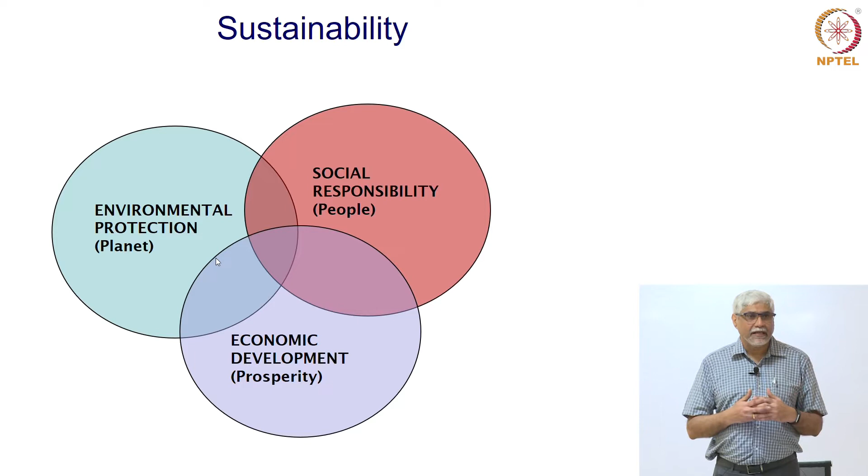We can go into more detail on the part of sustainability which influences people, or the social responsibility. We could look at the different aspects that will benefit people or can affect people. What comes to mind right away is that people should have a place to live and work that is comfortable, should have water, food and so on, and comfort, hygiene. These are things that people would require to live in a proper way.

Further, we look at transportation, how people can move about without wasting a lot of time, without facing a lot of difficulties, how people can be transported. So these could be aspects of social responsibility that engineers, particularly civil engineers, could be concerned about.

About the environment, what is it that we want to protect? What should be protected in the natural environment, in the planet, so that, as I said before, future generations are not affected and other species that we share the planet with are not affected. So natural resources are of very grave concern. We cannot use up all that there is on earth for satisfying the needs of the present generation or just the next generation. So we are worried very much about conserving the natural resources.

Other than that, as I said before, we share this planet, we share the natural space with other species, fauna and flora, animals, plants and so on. Many have become extinct because of human intervention and we want to prevent this or at least slow this down as much as possible. So we are worried about the green cover, the vegetation, and what has been talked about a lot is climate change.

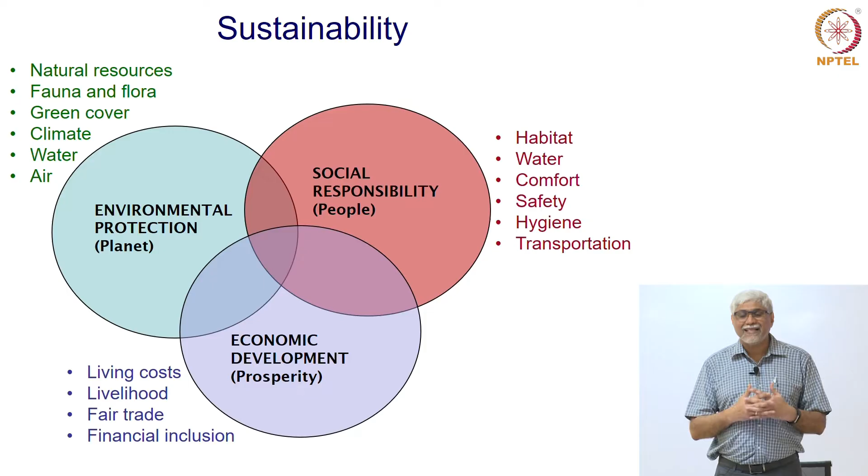So we will take some projects, some types of projects and see how we can go about in the future. Two questions are what we have to ponder about. One, is civil engineering doing enough? Can it do more to make sustainability better?

Secondly, as we go along, we are seeing so many new fields of engineering coming up, so many changes happening. Is civil engineering sustainable? Will we have civil engineers, say, after 2050? By the time this class retires, will civil engineering become obsolete, or will there still be jobs for civil engineering? So these are the questions I will try to answer during the course of this lecture by taking examples that are important, have made a big mark on the world today.

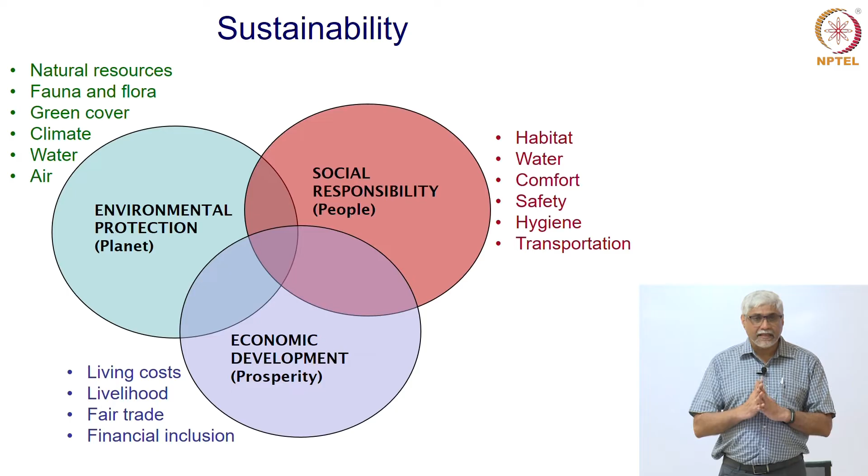So to summarize what I think civil engineering does for sustainability, for improving sustainability, civil engineers and civil engineering provide infrastructure which is very important for economic and social development, for commerce to happen, for industry to grow and for people to be happier and more comfortable. We need civil engineering infrastructure like bridges, transportation systems, water networks, sanitation and so on.

Civil engineering also provides or tends to provide housing, better workplaces, more comfort and safety. We also deal with infrastructure which is for public use, such as hospitals, water supply networks, sanitation systems and so on. So these obviously are beneficial to people, to commerce, to the industry.

Further, civil engineering in most large projects, and probably more and more in every project, plans or tends to protect the environment and the natural resources within the planning and execution. We don't want to have a project that will use up all the resources and create harm for the environment. Okay. So let us look at specific examples and see how different disciplines of civil engineering contribute to making something that is useful in these different contexts.

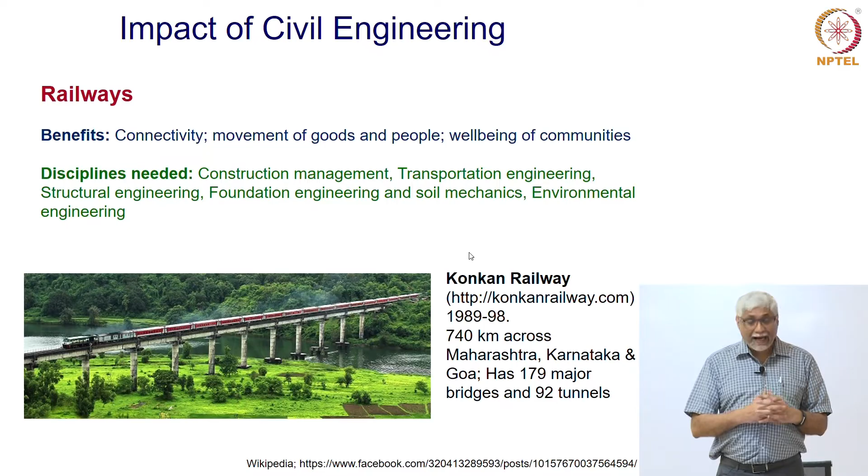Similar to railways, we have airports becoming very important. A community, a city or a town is said to have developed when it has an airport. So, it is always a landmark when a city claims that we have an airport. Some cities claim to have more than one airport. So, this means that these regions are very developed. It is a sign of development other than connectivity and goods.

Construction management. At this remote area, how can we make technologies available for fast construction? Okay? And transportation engineering obviously to plan the systems, how to control traffic, how to make sure that planes can land safely and take off safely. Okay? So, this is also an example where again connectivity has been brought in.

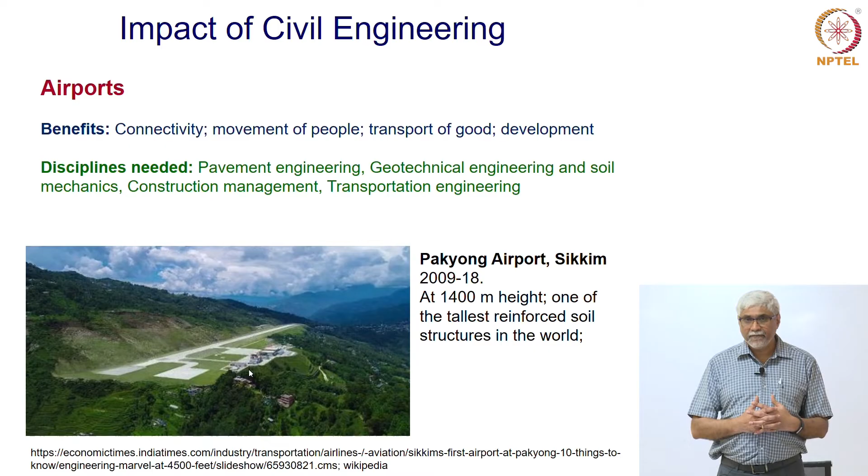Within cities also people have to be moved, and we find that in India almost all the major cities have a metro rail project, and it is also almost guaranteed that for the class of today, until you retire, there will be at least one if not more metro rail projects happening. Why are these so important?

Because we can decrease the traffic congestion, we can have people reach their office from home, go from one place of commerce or entertainment to another quickly without causing so much of a carbon footprint when they have to use their own vehicle. So, the welfare of people is very, very important. People, if they are able to move around efficiently and economically, will promote the society.

Pollution is better if you imagine everybody using public transport instead of their own transport, having a scooter or a car. There is a lot of pollution, and the whole carbon footprint decreases. What do we mean by carbon footprint? It is the carbon dioxide emissions coming from burning of fuel, from using machinery, from making machinery and so on. All this will decrease if we have better metro projects, more metro projects.

So, again a lot of these metros utilize tunnels. For example, the Delhi metro started construction in 1998 and is still going on, they are adding more and more. Right now, it spans about 400 kilometers, 285 stations and 2,700 trips daily, which can take about 5 million people every day through Delhi.

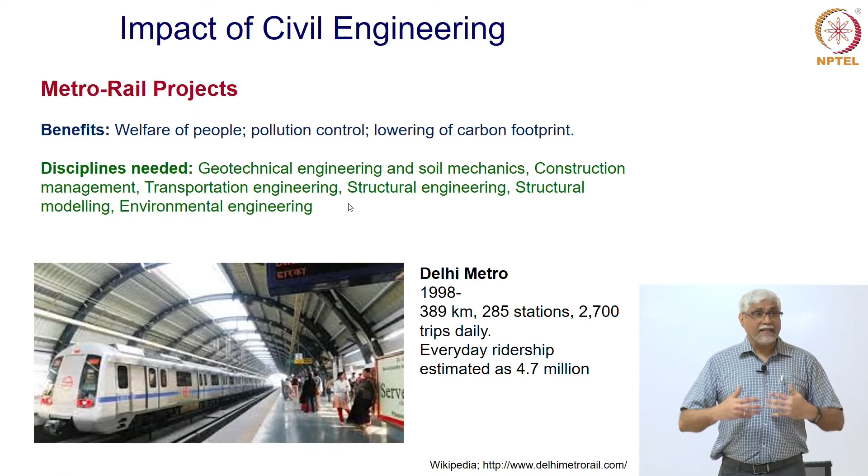We also contaminate, we have also messed up a lot. So, civil engineering also comes in remediation, not only to make things, new things, but also to correct mistakes of the past. So, contaminated water is available in many, many places. So, remediation or cleaning up is a very important thing.

So, major effort was taken to clean up this water, separate the more toxic from the cleaner water, take this toxic water, mix it with cement to solidify and put it in these containers of concrete so that this can never escape. Okay. So, this was a major project. In each of the slides, I give you some references that you can get more information on.

So, here environment protection was very, very important in health, because if you have this toxic water or waste lying around, eventually it reaches the groundwater, and groundwater is what we eventually will drink. Other things get affected, animals, plants, the environment itself changes and gets affected if we don't clean up.

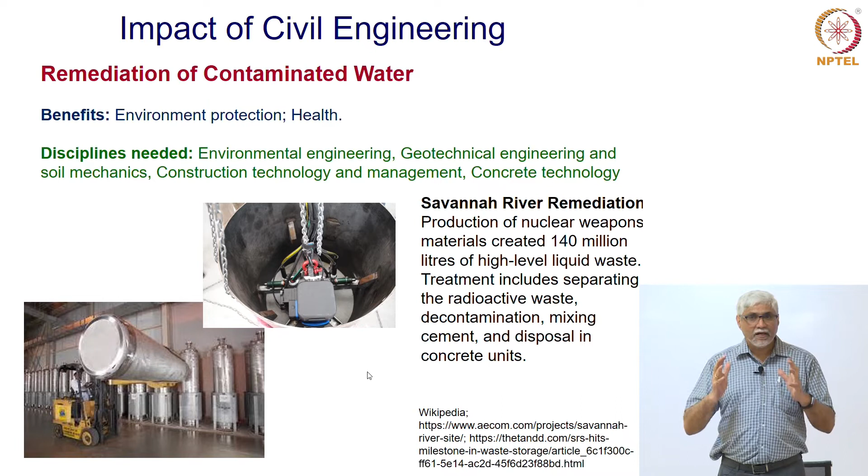We talked about projects, we can also talk about smaller projects, systems of civil engineering or even elements. Bridges, which form part of many of the projects that we've talked about, connect people. We have seen, you might have experienced by yourself, that when a bridge is built, new commerce comes up.

Small populations rise around a project at the beginning, at the end of the bridge, and shops show up and commerce increases, connectivity is better. Instead of going around a bay, they can cross the bay faster. Okay. So, carbon footprint decreases, pollution is less.

So, again structural engineering is important, modeling is important, because we want to know that the bridge will be stable for many, many years, that it will not settle down, it will not break, it will not crack. Geotechnical engineering for the foundations, construction management, transportation, environmental engineering and so on.

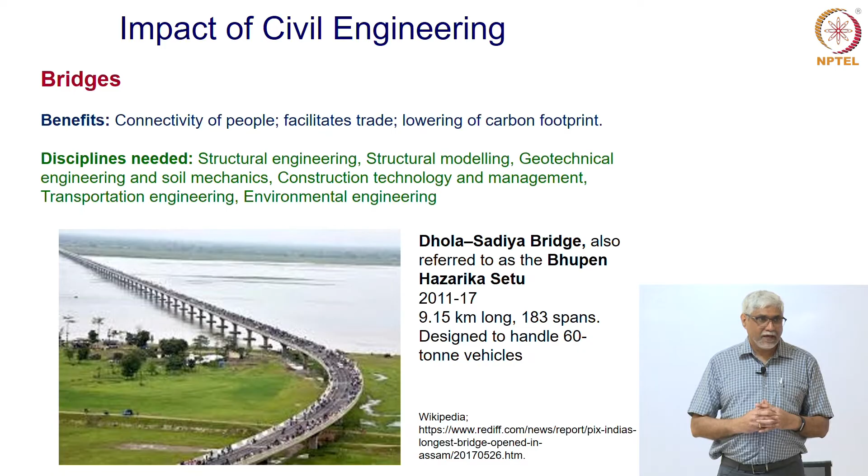Why do we need oil? We need energy. For progress, we need energy. For economic progress, it becomes very, very important to transport oil with the least carbon footprint, messing up the environment the least. Instead of having trucks and tankers, can we have a pipeline? But you can imagine a pipe running 1,300 kilometers. There has to be a lot of modeling done because the pressure should not drop, there should not be leakage. If there is a leakage, we should be able to detect it.

So, a lot of sophistication comes in to modeling it, constructing this, what are the type of structures that are required to keep this pipeline above ground, what sort of modeling is required, and the geotechnical engineering. What will happen when there is freezing and thawing of the ground? When there are colder temperatures, how will things change? So, these are major projects, very unique. This is not something that you hear of every day, but a project like this can last for a long time and will require major management to make it work.

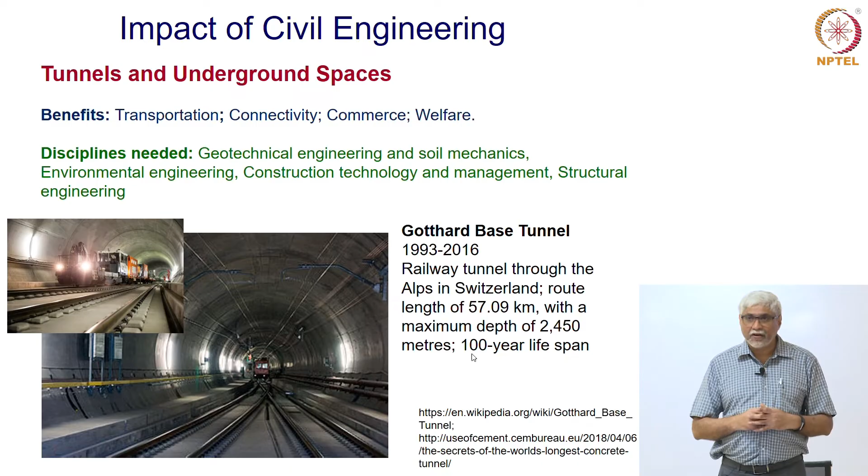Talking about modeling and engineering and planning of traffic. The modeling of traffic in cities, between cities is becoming more and more complicated. And in a country like India, you have all sorts of traffic, what they call multimodal traffic on the road. You have an auto rickshaw, you have a cycle, you have a bike, a big bus, a car and so on.

Further, what people are looking at is automated vehicle traffic. You must be hearing on the news that there are driverless cars, where instead of driving your own car, you are just enjoying the ride or being transported. So, there is a lot of traffic flow modeling which is happening in all these cases of possible traffic being only of automated vehicles and driverless vehicles. Groups of vehicles, how are they going to travel in the roads, through the roads and into the cities?

Why would we do it? We want to decrease time delays, we want to decrease congestion, we want to improve the health and safety and facilitate commerce. So, transportation planning and modeling becomes very, very important. All of you who have been in cities, most of you have, will know the chaos that happens when there is rush hour, and this can happen in many major cities.

Now, imagine that all the vehicles are driven by themselves. In current circumstances, it would be chaos, the cars may never move. So, we have to know how to model the flow and control the flow such that everything will happen well. So, traffic flow theory is important to model such movement and work on it on the individual vehicle and groups of vehicles. How can you make groups of vehicles move forward? How can they interact with each other?

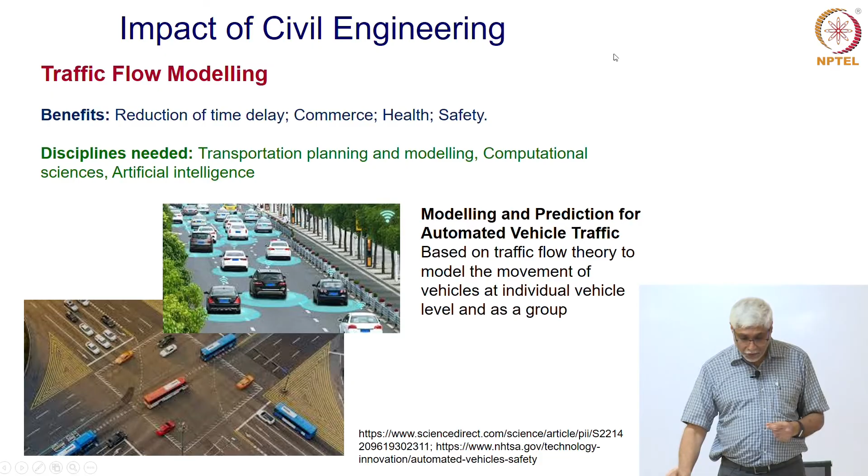In construction again we have a lot of automation, we have robotics in construction which is becoming very, very important, more and more usage. Why? Again for quality and safety. Instead of an unskilled worker being involved, suppose we have a robot that is properly designed, we can ensure quality, safety especially in difficult environments, faster construction. Construction speed dictates the cost and also how fast we can deliver comfort, safety and facilities to people.

So, this means that construction technology becomes very important, computational sciences, because different machines have to interact with each other, machines have to talk to each other, artificial intelligence becomes important. And what is coming up more and more is what is called lean construction. Lean construction is where you have less wastage, you have faster construction and less errors creeping in.

So, this means that we have to design properly the material, the system and understand what the road is going to go on. Okay. So, these are things like the automated vehicles that are new technologies which are coming up. We are looking forward, and this is where I am trying to answer the question of, is civil engineering sustainable? As long as we do our job of making sure sustainability is there, and as long as we are bringing in new things all the time in civil engineering, there will never be a possibility that civil engineering goes out of fashion or out of requirement.

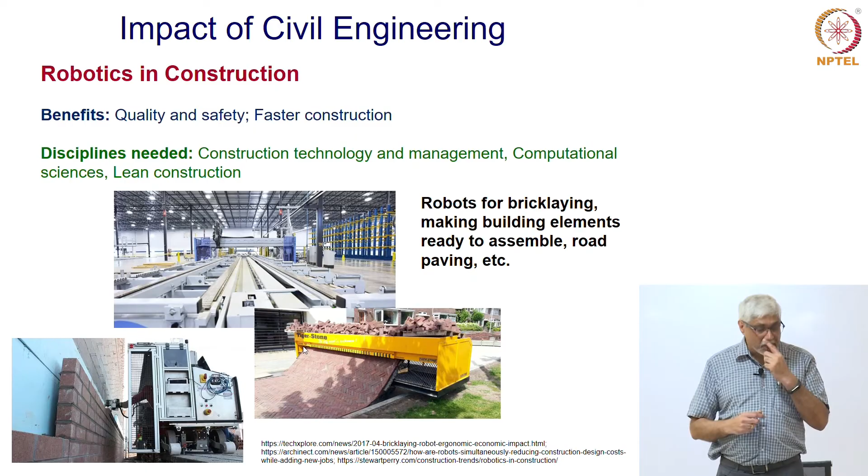These are the things which will keep civil engineering sustainable. Talking about roads again, there is a new technology which is looking at precast concrete pavements, where instead of the long process that all of you have experienced of laying asphalt, laying concrete to make a road, can you make the concrete like Lego bricks somewhere in a factory, have them piled up, and when it is needed, bring these panels, put them together and you have traffic in a few hours crossing.

So, this could be used for new pavements and for pavement repair. Okay. What do we get? Quality and safety. Instead of the potholes, can we have a new road fast? Can we have a road repaired fast enough? It will be more economical in the long run to get it done. So, this means we have to understand how the concrete will behave, how the technology will be.

Can we bring in robotics? Can we bring in automation? How do we make sure that all the pieces stay together and for a long time? Again, lean construction, no wastage. Can we make it faster, less wastage and more economical? So, this is also some new technology which is coming in.

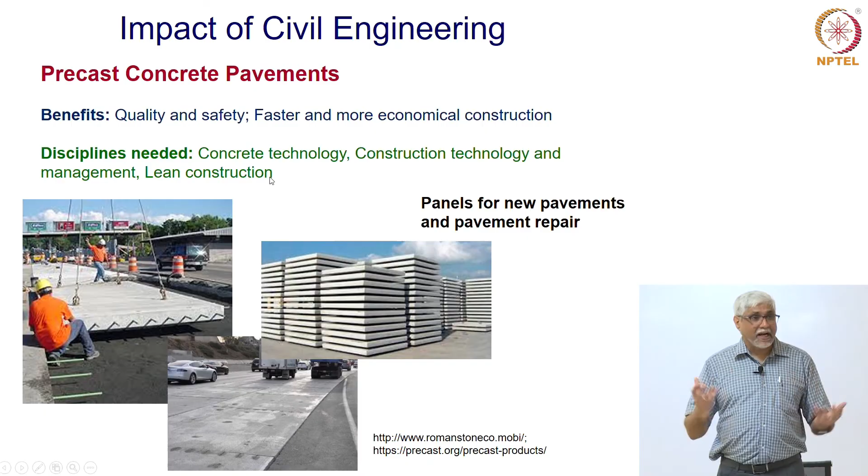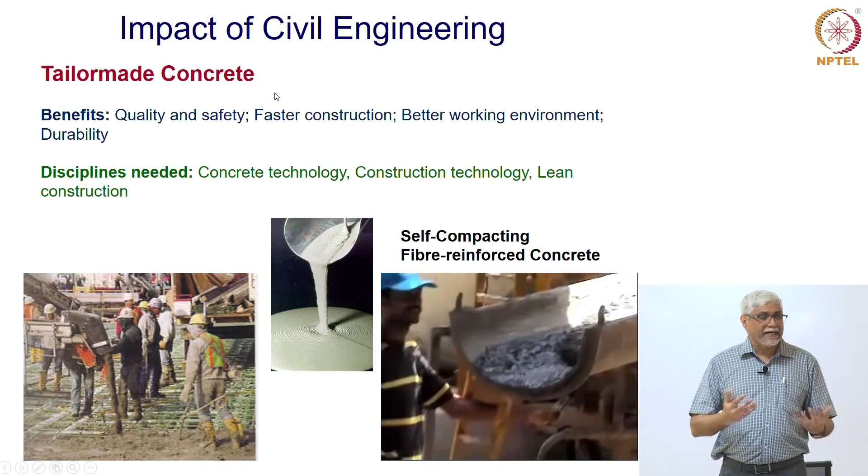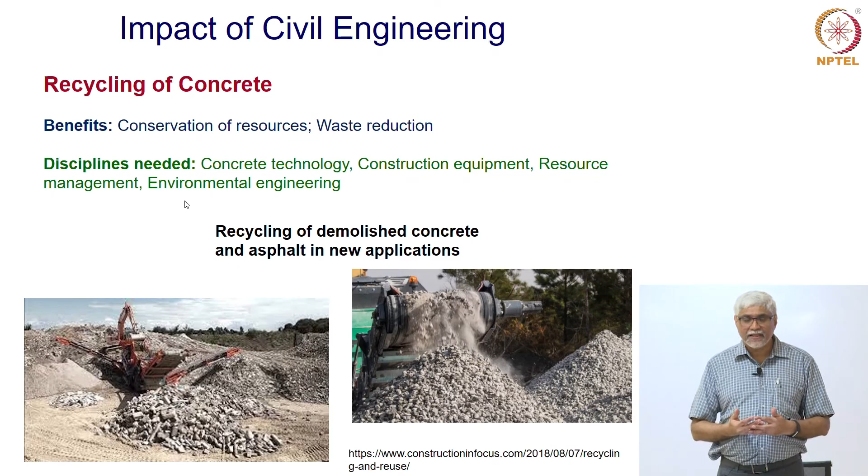So to summarize, we have looked at how civil engineering can promote sustainability, can help sustainability. I've also tried to answer whether civil engineering will be in vogue, will we need civil engineering in the future, or will civil engineering be sustainable for long enough? If we have to do this, the future of civil engineering has to be different, has to incorporate new things, it cannot be business as usual. So we can expect that civil engineering in the future will have certain characteristics.

First of all, it should become more location specific. It should be tailor-made. One solution doesn't work for the whole world. Even within the same country, it will not be the same technology. We will have to understand enough that just copying a technology will not work. We will have to bring up new technologies, adapt technology. So civil engineering in future will be more location specific, will be tailor-made,

just like the word tailor, right? When you want clothes, you choose what you want. All of us don't wear the same clothes, right? All of us will not like to wear the same clothes, may not fit into the same clothes. So the technology also has to be like that. We have to see what fits us. We cannot use something developed elsewhere blindly without adapting.

We should continue to be more protective about the environment. Many aspects, using of resources, using of water, contamination, destroying our natural resources. This will happen less and less, and this is what we are seeing as well.

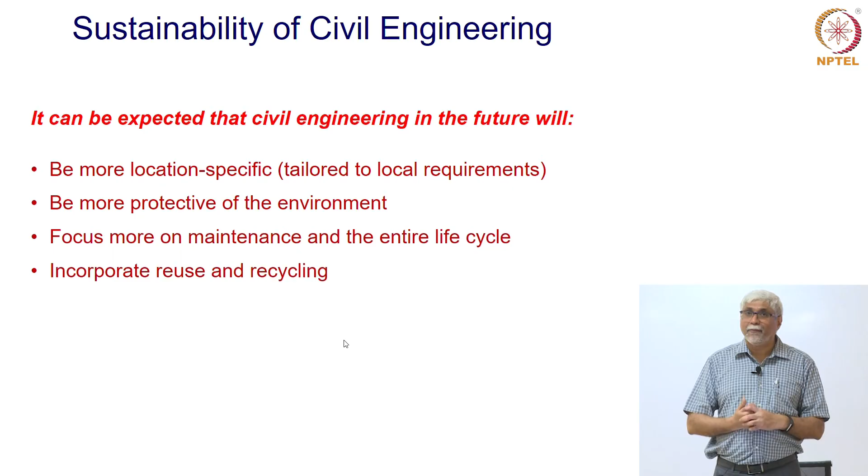Instead of using all new materials, we will use more of older material and we will recycle more and more. Just like many things, like plastics, are being recycled. We can have more construction done with old construction material. We could even make it compulsory that when you demolish something, you should use all that material back in the new construction.

We will involve more automation, less manual labor. Labor has always been a fundamental part of construction. We have used unskilled laborers, lots of laborers for construction. This means that there are some people who are always working very hard, not getting paid a lot and having limitations in what they can earn and have as a livelihood. So this will keep changing. We are seeing, like I mentioned, robotics and so on, there will be more and more automation.

We will also have construction that is smarter, buildings that are smarter. We will have sensors built in, just like we talked about automated cars. There could be buildings also which could incorporate sensors, tell us how we have to adapt if something is not comfortable. How can we change? Before collapsing, can it warn us that something is wrong in the structure so that we can control? So these are different aspects that I believe will make sure that civil engineering is sustainable and going to go on for a long time.

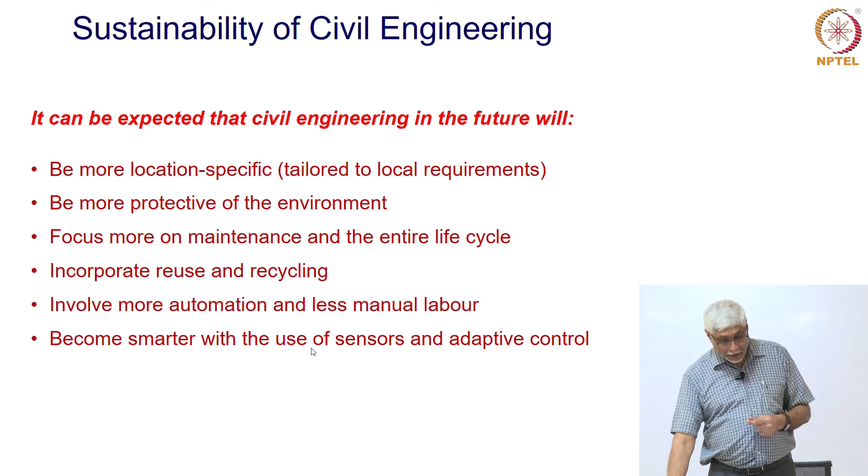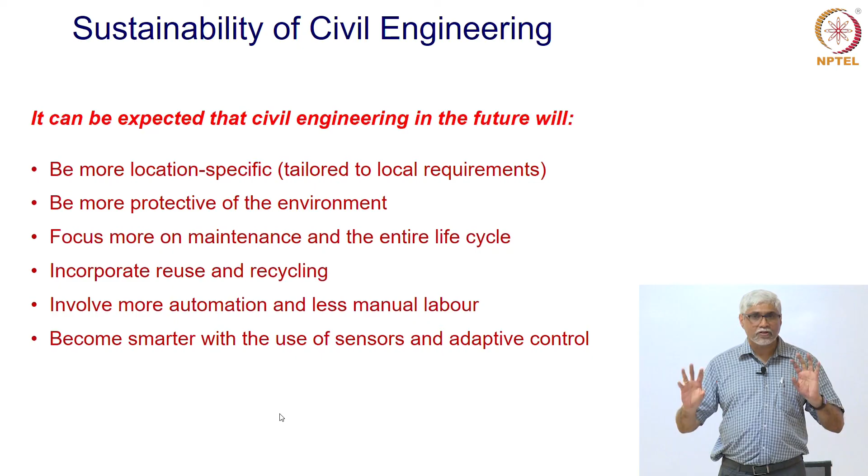So if I had to predict changes in civil engineering, these are things that will possibly happen to make civil engineering continue to be relevant and useful for society. Okay? So with that, I finish, and as I said, the idea was to focus on two aspects: how civil engineering helps in sustainability, and to also think ahead about how civil engineering will change, evolve, adapt to continue to be relevant to our society. Okay?